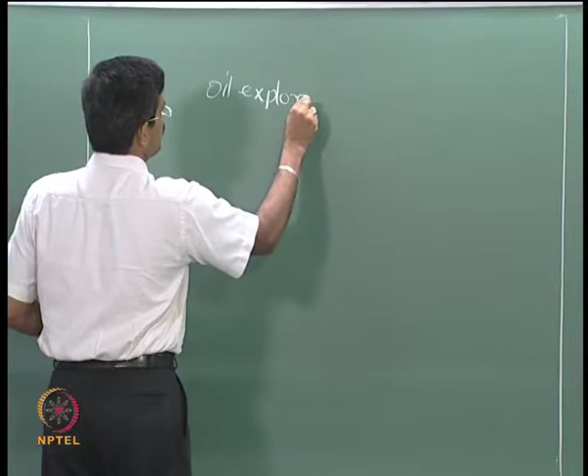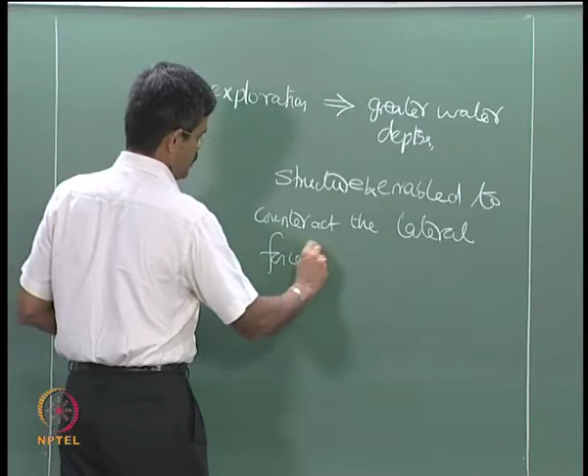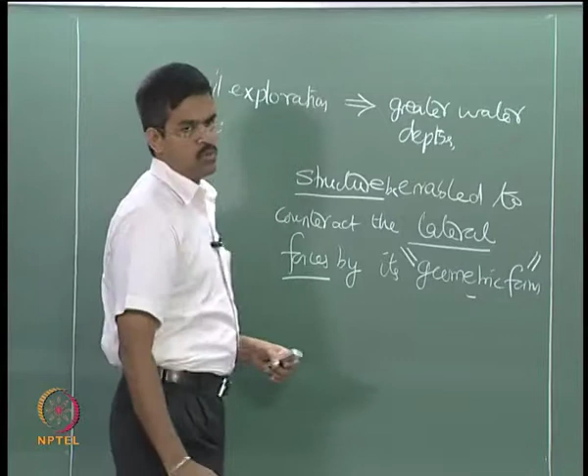As deep water oil exploration moves towards greater water depths, the structure should be enabled to counteract the lateral forces by its geometric form. A structure should be capable of alleviating the lateral loads by a new geometric form. Therefore, as you move towards greater water depths, you should have a structural form which adjusts itself for catering to the additional loads coming because of the greater water depths.

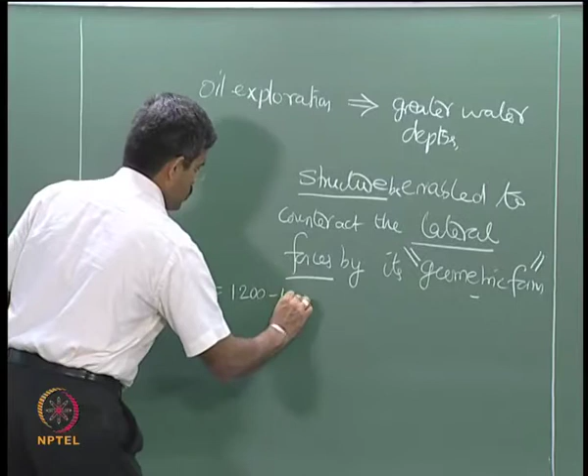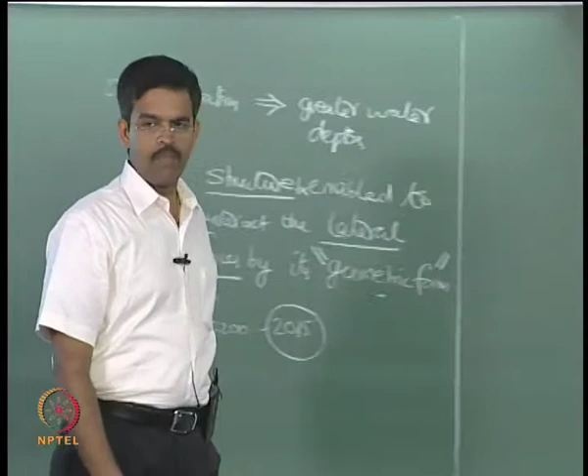We are now looking at exploration approximately in the present trend at water depths of 1200 to 1500. It is expected that we will go to exploration depths of even 1500 to 2200 by 2015, because hydrocarbon resources have started moving to deeper waters. Therefore, the conventional platforms, what we have in jackets structures, are totally obsolete now. They are of no use at all for any kind of new exploration.

So we are looking for new trends of offshore structures where most commonly people have started using FPSOs, and for exploratory drilling people start using drill ships, etc. But all these structures have their own limitations of positioning them for rough sea states. So we would like to go for a permanent installation, a structure or offshore system which can be installed permanently in a location for a period of 5 to 10 years, and which can also counteract the lateral loads in rough sea states at greater water depths.

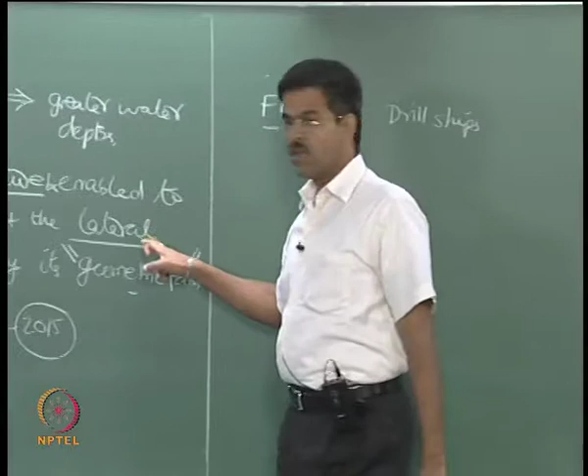So we are looking for new generation offshore structures which we will discuss in this lecture, where we will also touch upon the dynamic analysis. If you look at the new generation TLPs, even tensioned leg platforms have moved to deeper water depths. Two interesting forms have been arrived at: one is what we call Moses TLP, another is Sea Star TLP. Both of them are advancements in geometric design.

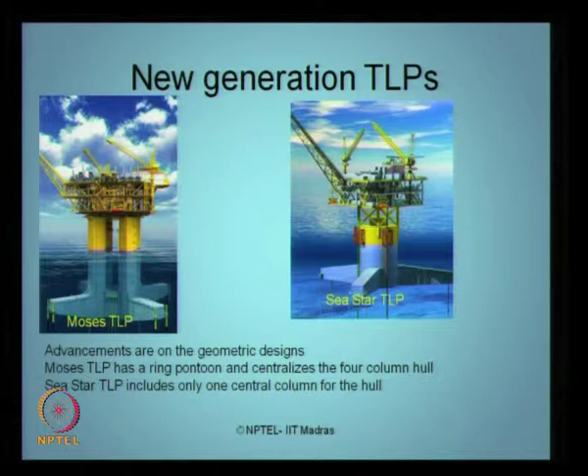In the first module of lectures we have given you detailed statistics of different kinds of TLPs constructed all over the world till the year 2012. Interestingly, people have moved further forward for greater waters, other than what TLP can cater to.

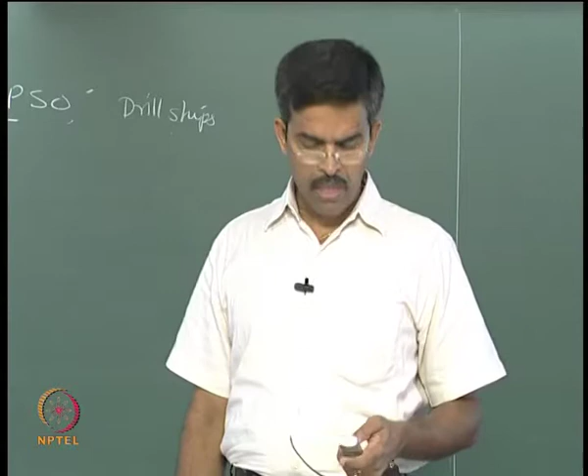So buoyant leg structures have become a very interesting and innovative application in offshore platforms. As the name suggests, each leg will float on its own self buoyancy, that is why they are called buoyant leg structures. Interestingly, only one platform has been constructed so far successfully, which is again on a trial basis, which I will show you now, based on which a new geometric form is attempted to be evaluated in the latest research. We will see what is happening here.

Before that, let us try to understand what BLS means. BLS are actually tethered spar. Buoyant leg structures are nothing but tethered spar with a single or group of cylindrical water piercing hulls. They are expected to be an alternate successful structural form to TLPs and spars, that is what literature projects. They are essentially positive buoyant structures. Positive buoyancy means the buoyancy will exceed the mass, as we understand in case of TLPs also. Therefore, they have got to be held down to the foundation of the seabed using some external restraining arrangement, usually it is tethers.

The positive metacentric height of this kind of structure is essentially maintained in the design. You can always maintain the metacentric height to be positive or negative with respect to the center of mass, depending upon your mass distribution on the superstructure and the hull. So you always maintain a positive metacentric height to ensure desired stability even after the removal of tethers.

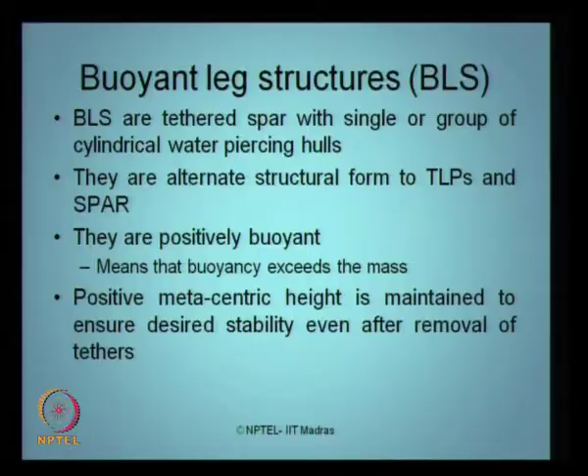That is a very important aspect, because in recent literature there are many cases of tether pull-out happening, especially in TLPs and guyed towers. The tethers get pulled out or cut because of marine trafficking or impact of vessels or barges on the platforms. So whenever a tether gets pulled out or disconnected, a positive buoyant structure will always tend to lose its stability.

So one important aspect in present research focus is, in case the removal of tethers happens, will the structure sustain its stability as a positive buoyant system. This is where we deviate completely from conventional platforms like jacket structures to fully floating structures, since they are not ships or FPSOs moved using a dynamic positioning system at a temporary location.

Of course, operational sea states for FPSOs and drill ships are entirely different from what we look for in a permanent system like this. In case any critical sea state is expected, FPSOs or drill ships are made non-functional. They will sail, but they will not be involved in production.

Whereas in these kinds of platforms there is nothing like a dynamic positioning system; it is a permanent, or more or less semi-permanent, installation which has to cater to rough sea states even when fixed, and we are talking about systems working at greater water depths.

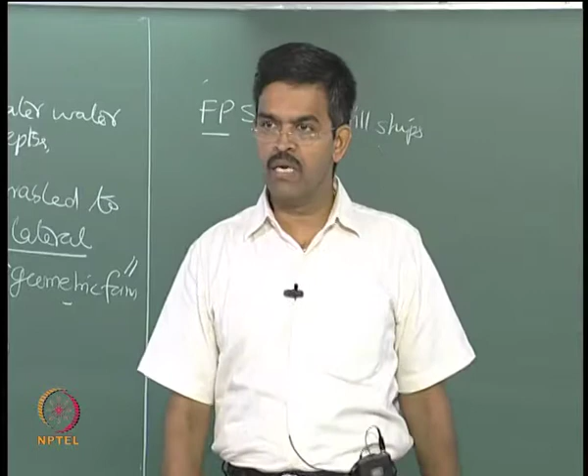So one important focus of this kind of research, as indicated in the literature, is that even though you get a tether pull-out in these systems, will the system remain self-stable and floating, or will it lose stability. Therefore, in most of these innovative forms, analytical, numerical and experimental work should focus on what we call free flotation analysis.

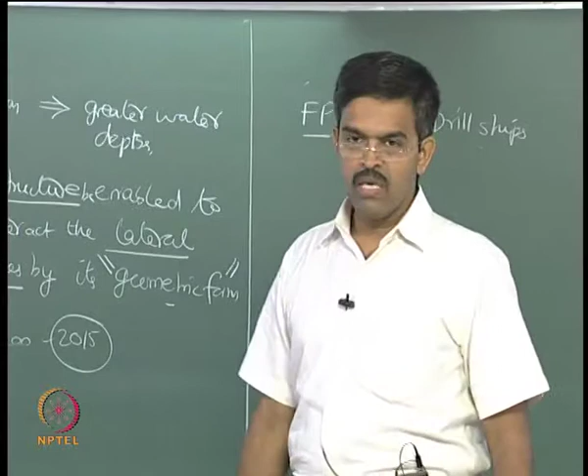This has become an important focus now in dynamic analysis of deep water or ultra deep water offshore systems, which was not a focus maybe 15 years earlier. We look for free oscillation studies, whether experimental, numerical or analytical, depending on the model being generated, because the focus is to check whether the system remains stable and position-restrained, or at least stays in position, even when the tethers are completely plugged off.

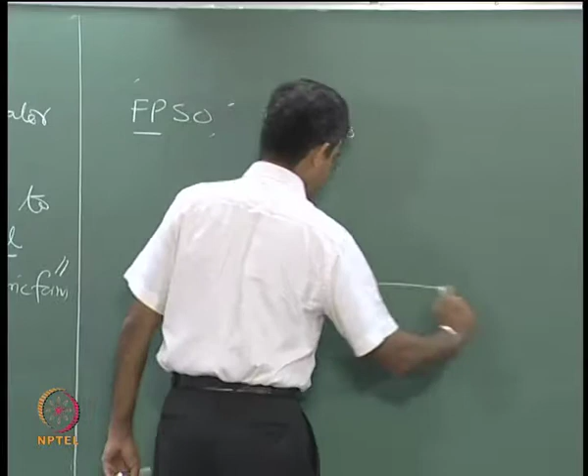So there is one more derived advantage from this kind of stability analysis. If I have a system—let's say this is the sea, this is the seabed, this is my system, maybe a black box—which is self-sustainable even when there are no tethers plugged into the restraining system...

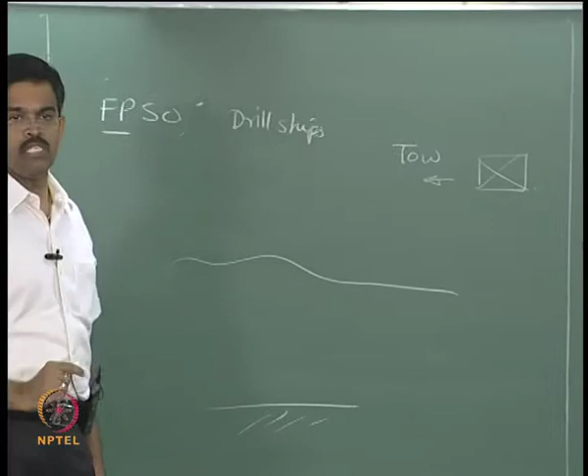One derived advantage of this kind of system is that I can easily tow it using a barge, so the installation becomes very easy in this case. Such systems, remaining self-stable without tethers in position, can be easily towed.

So the installation becomes easy, as well as decommissioning becomes simple. So there are two derived advantages gained by making the system self-stable even when the tethers are plugged off.

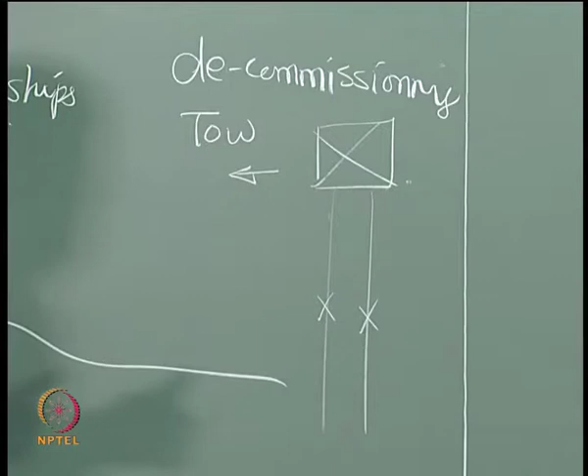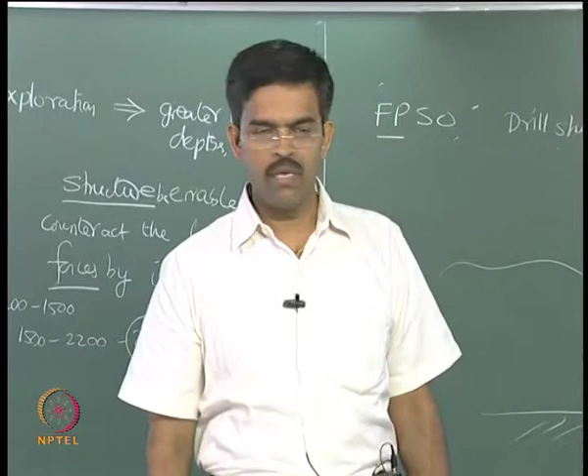Also, since the structure has positive buoyancy, to make it achieve a specific design draft you should be very careful in imposing tension T to the cables, so that the weight and T are adjusted to achieve the design draft for a specific sea state position. To hold it permanently in position, I need the draft, and the draft will be achieved only by imposing T naught—remember, because it is a positive buoyant system; otherwise it is free floating.

So towing, installation, commissioning and decommissioning become very easy compared to old generation platforms, which have been a Herculean task, especially jacket structures and gravity-based systems that have been very difficult. Now this system has become more comfortable. Therefore, our dynamic analysis should also focus on these kinds of studies if we really want to promote new generation platforms for deep waters.

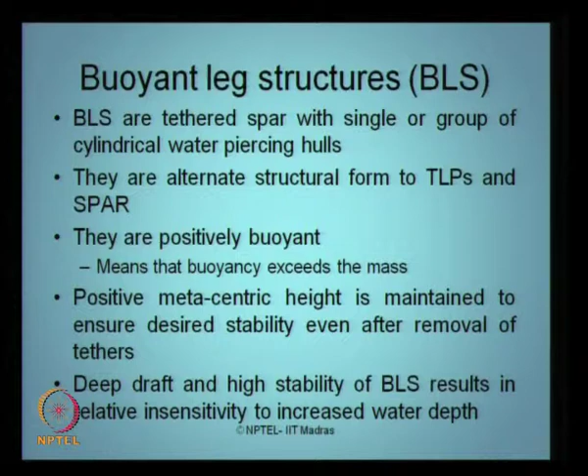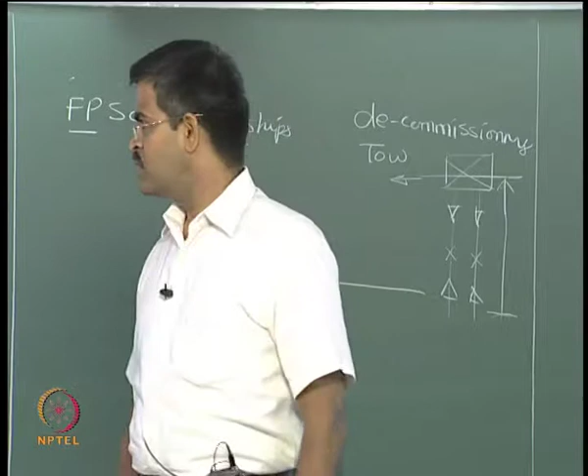Deep draft and high stability of BLS, as indicated in the literature, results in a relative insensitivity of these kinds of structures for ultra deep waters. That is one of the important reasons why buoyant leg structures are carried forward for new generation platforms, because the deep draft and high stability of these units make them water depth insensitive. You can carry them to any water depth you want. So one main focus for new generation structures is making the system self-stable, positive buoyant, deep draft and highly stable, and BLS is one such example.

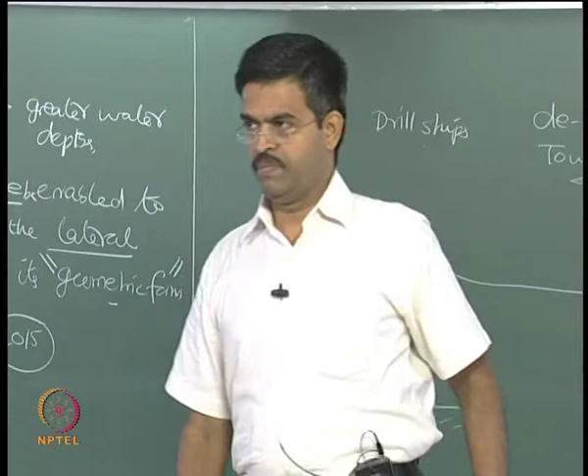Of course, the innovation does not stop here, it has started in recent times. The papers we show you now are only about 1 to 1.5 years old, just published in the literature, so people are now looking at this kind of platform. The concept of using BLS for production and drilling started only in 2005. The first paper was presented by an author at an ISOPE conference in Japan. So it started only about 6 to 7 years ago as a concept, but verification of this concept on a geometric form, experimentally, analytically and numerically analyzing it dynamically to see whether it is stable, is only about 1 year old. So it is a new generation platform relative to any other established platforms, and obviously asking whether such platforms have been installed has no meaning, because it is still under trial.

BLS, being a deep draft structure, reduces the exposed structural part near the free surface, which is a great advantage of deep draft structures. Therefore, this reduces the lateral forces on the structure compared to a TLP.

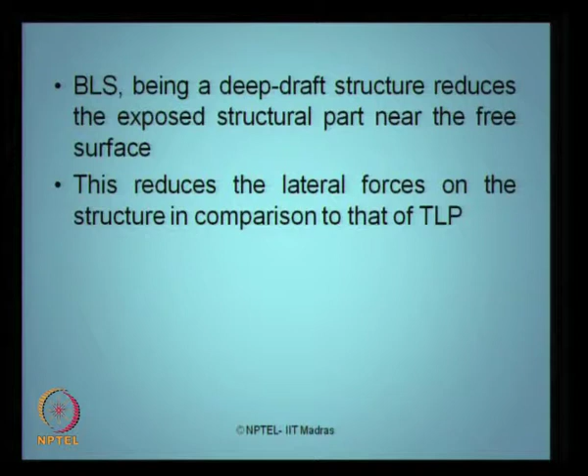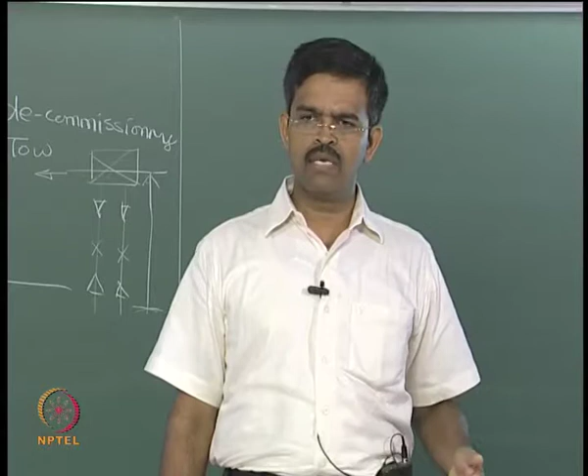Another advantage of BLS is that I can have a moon pool through which I put my risers, so the risers are also protected against lateral forces near the free surface, because the free surface is where wave forces are maximum. Therefore risers can be protected near the free surface elevation of the sea and will attract less forces. Of course, these advantages were also present in earlier conventional platforms. So the geometric form invention started by getting the merits of the previous platforms and overcoming the demerits of the older platforms.

Looking into the concept of integrating tension leg platforms into buoyant leg structures, a new structure was proposed which people have addressed as tension buoyant towers. They were designed and tested, essentially an amalgamation of BLS onto a TLP. This is the tension buoyant tower you see here, developed and designed by Horton Wilson Deepwater Systems Incorporation, US.

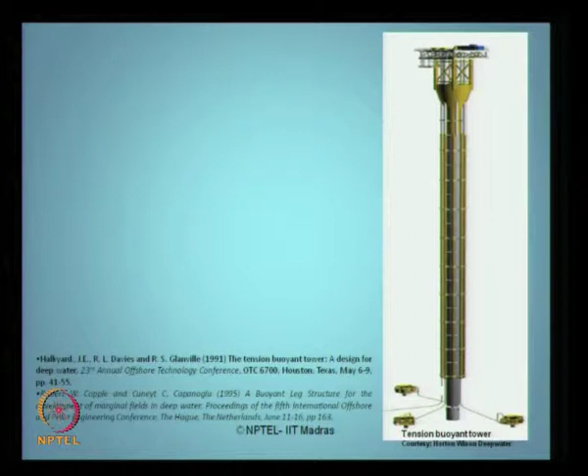Halkyard et al. first gave the design of this in 1991, published at an OTC conference in Houston, Texas. In 1995, Copple and Capanoglu gave a concept of BLS extended for deepwater offshore structures for production facilities. This is a classical tension buoyant system, numerically analyzed by Halkyard, not constructed. BLS had the advantage of a spar because of its shape, which resembles a classical spar with a deep draft feature. It also resembles the behavior of a TLP because it has a tether restoring system, with satellite subsea wells supporting it.

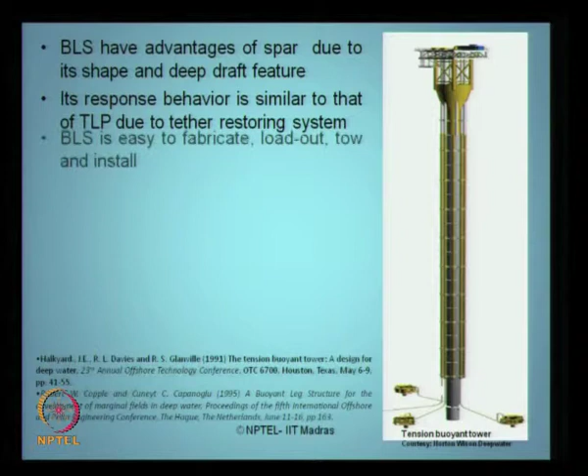The only demerit of this kind of platform, as proposed by the inventor, is that it is suitable only for leftover and marginal fields, since it cannot support larger fields because it does not have storage capacity. But the advantages are very significant for tension buoyant towers: it is a new generation deepwater structure, easily relocatable, simple to install and decommission, and very easy to fabricate and install. These are the two major advantages.

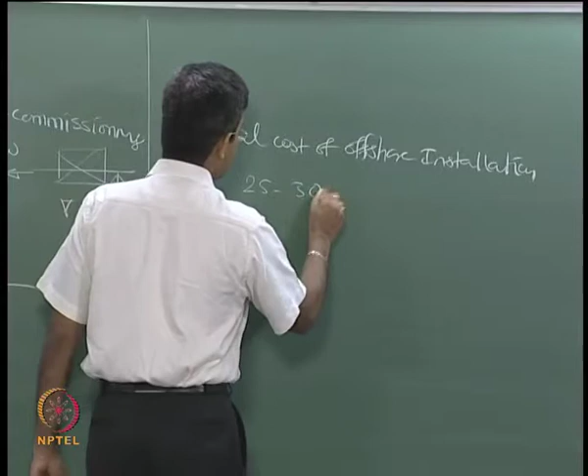For your understanding of why we are concerned about fabrication, installation and decommissioning, consider that in a total cost of offshore installation, which runs to about 10 to the power 5 billion US dollars, about 25 to 30% of this cost goes on installation.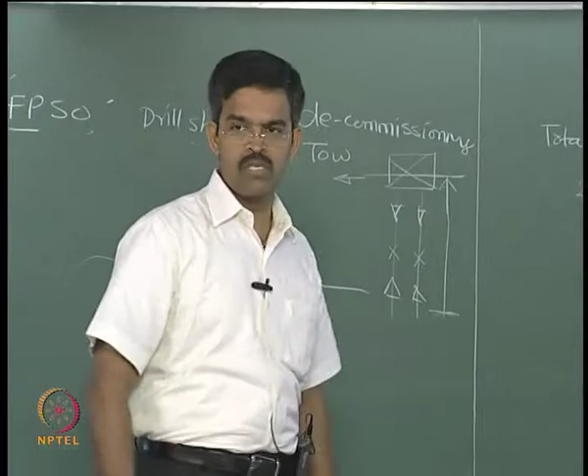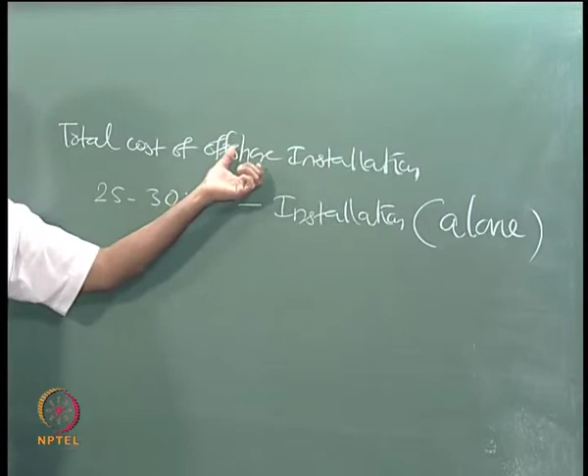Installation alone is a very amazing figure. You have only a countable number of contractors who can execute installation of deep water structures in Gulf of Mexico, very few. So they have a monopoly. It is not a disadvantage, it is an advantage, because the technical know-how of installing a system in deep water is a patented right of these contractors. So they charge approximately 25 to 30% of the capital cost, the capex, of this installation only for installation.

So if you really want to reduce this cost for deep water systems, I must think about a system which can be easily towed and installed. That is why the primary issue is focused on new generation platforms, on how they can be simply towed and commissioned.

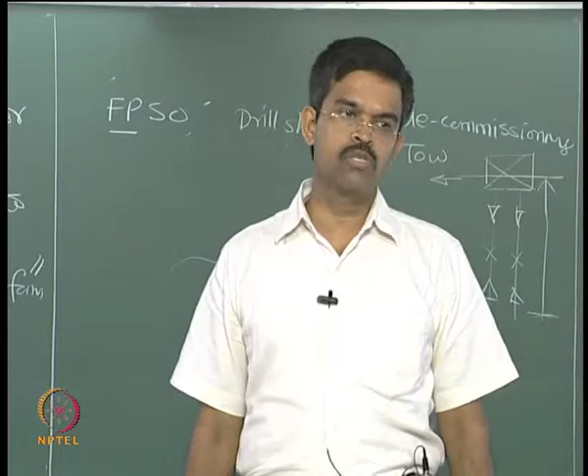So TBT came into play, and tension buoyant towers showed these advantages. Of course, no papers and no literature will give you a cost comparison of the installation platforms in the world commercially, only from an engineering perspective. But it is very clear from some financial aspects that about 25 to 30%, one third, of the capex cost of the platform goes purely into installation and commissioning. It is not that simple a figure.

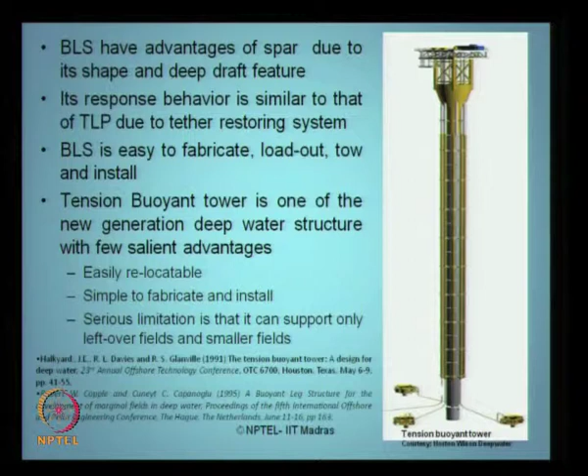This was proposed about 15 years back as a concept, a numerical model that was not constructed. Subsequently, a platform was attempted as a tension buoyant platform. The first buoyant tower, CX-15, was loaded out in Peru's Corvina offshore field, which has now become a promising figure, going to produce oil by end of 2013. It is a new platform, recently constructed and now commissioned.

There are other innovative offshore generation structures now available in the literature. Their innovative geometric form is understood to have improved motion characteristics suited for deep and ultra-deep waters. Some classical examples people have attempted in the literature: one is what we call non-ship shaped FPSOs. One may wonder why a ship shaped FPSO may not be a successful model.

FPSO stands for floating production storage and offloading facility. So it is a floating facility essentially, it has production facilities, it can do drilling, it can store, and it can offload. For example, you have a barge, and you keep transferring the extracted oil onto the barge and offloading it to shore. So it has all these facilities involved.

Essentially, people thought that unused barges and ships could be converted to FPSOs, because ships have very strong, favorable flotation characteristics for which they were designed. So people converted and remodified existing commercial ships, not passenger ships, and started using the hulls for FPSOs. But they found there are specific flotation characteristics associated with ships related to head sea conditions, which affect production in rough sea states.

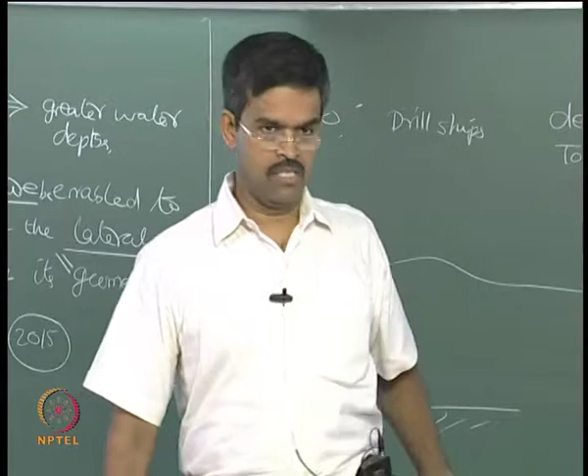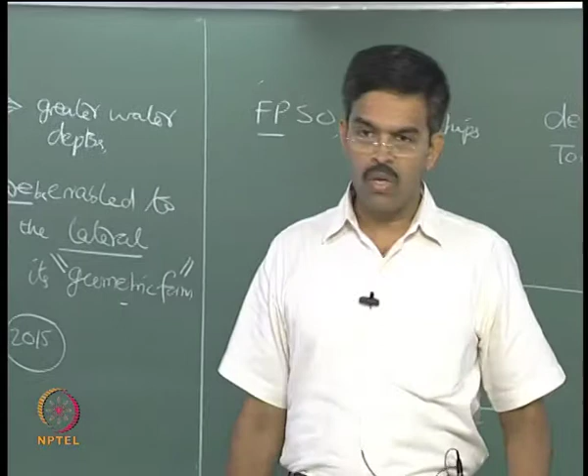So people thought, why do I have to have a longitudinal hull or a lateral reduction hull? Why can't I have a circular hull which can approximately represent common dynamic analysis characteristics for all approach angles of waves? So people said, I will go for non-ship shaped, not necessarily circular, hulls for FPSOs. That is one of the recent generation platforms people have attempted.

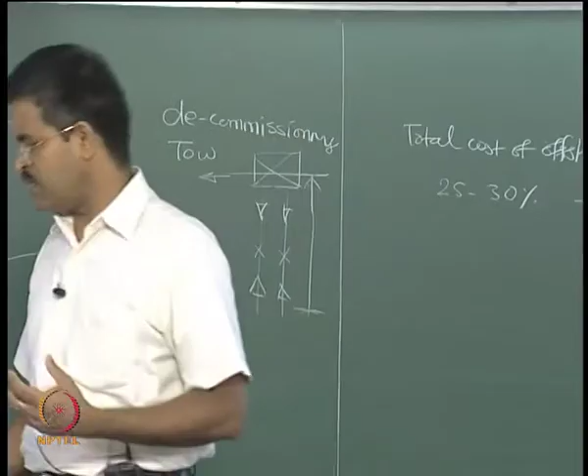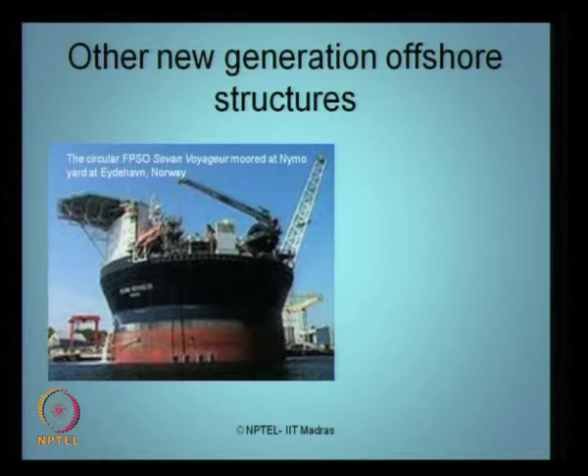I think you will appreciate that Norway is coming out with alternative renewable energy sources, and they want to make the country completely reliant on renewable energy by the year 2020. So it is a new kind of platform coming up, not for oil exploration but for shale gas, etc.

The other one is again a non-ship shaped, circular hull structure called Goliat. It is the first oil field developed in the Norwegian sector, a cylindrical FPSO. Production is due by end of 2013.

It is again a ship shaped FPSO, non-ship shaped FPSO. The third structure is what we have originated in our studies here, which is again a concept from Triceratops.

The Triceratops concept was first floated by White et al. in 2005, who said this platform can be used comfortably for deep water oil exploration because of some structural advantages it has. Let us go through these advantages quickly in this presentation.

It essentially consists of a deck which has the same topside detail as that of a conventional platform, and of course the tension buoyant leg structures.

The buoyant leg structures are what you see at the bottom, which are groups of BLS anchored to the seabed using tethers, therefore these are called tension buoyant leg structures.

Of course the BLS and the deck are connected interestingly by a ball joint here. So the ball joint connects the deck and the BLS.

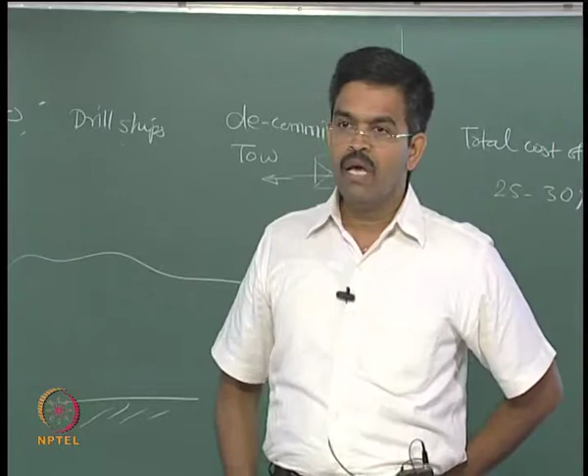The greatest advantage of this form, derived from an articulated tower, is that in case of any lateral load coming onto the BLS because of wave or current action, the BLS are not interconnected to each other. So each one of them has freedom to move independently.

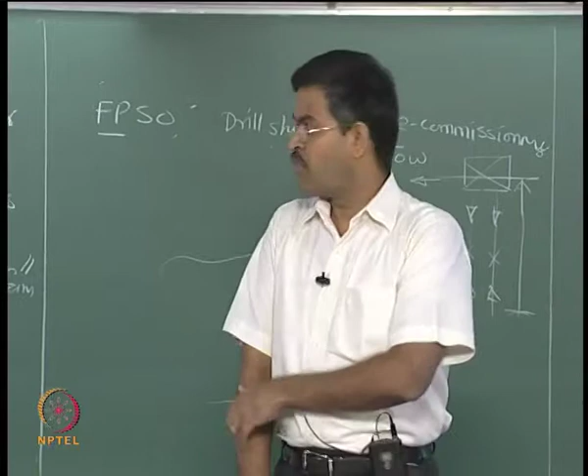This independent motion, essentially in terms of rotation, will not be transferred to the hull because of the ball joint. The ball joint absorbs the rotation from the substructure to the superstructure in case of rotational degrees of freedom. Similarly, when the hull starts rotating because of aerodynamic forces like wind action, that is not transferred to the BLS.

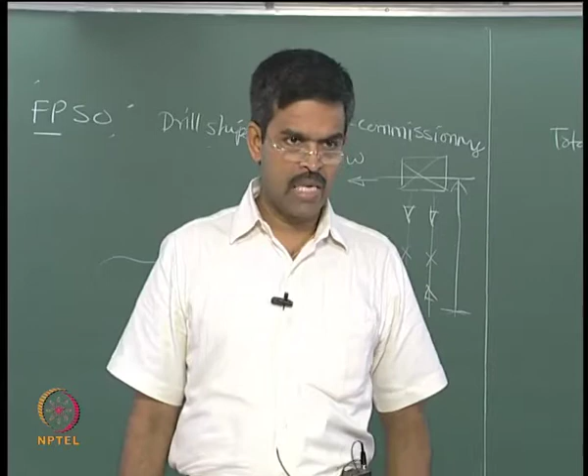It means certain categories of forces and displacements in terms of rotation are isolated from the dynamic characteristics by introducing a disconnectivity between the BLS and the deck, only in rotational degrees of freedom, whereas in displacement degrees of freedom like surge, heave and sway, this holds as a rigid body.

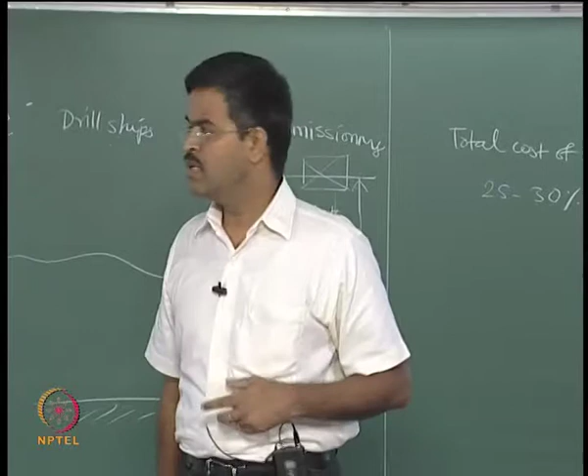So the advantage is, as we already see, there are distinct categories of frequencies as far as TLP is concerned. Similarly here, the response characteristics are isolated, so the rotations are not transferred, but the displacements are transferred 100%. So it becomes a rigid body motion.

Now, what is the great advantage we achieve by introducing this kind of disconnectivity in the rotational degree of freedom? The most uncomfortable region of working for a deck or for people on board is that rotational motion.

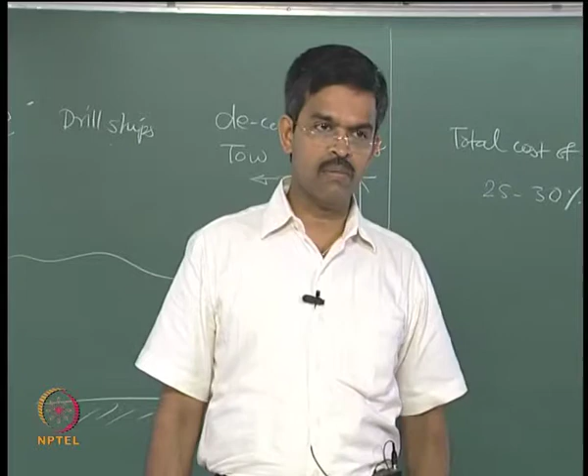In case of heave, the heave displacement, being a tether restrained system, is relatively very low, but the differential movement because of wave action with respect to any rotation, maybe pitch or roll, is phenomenally high because surge is very high.

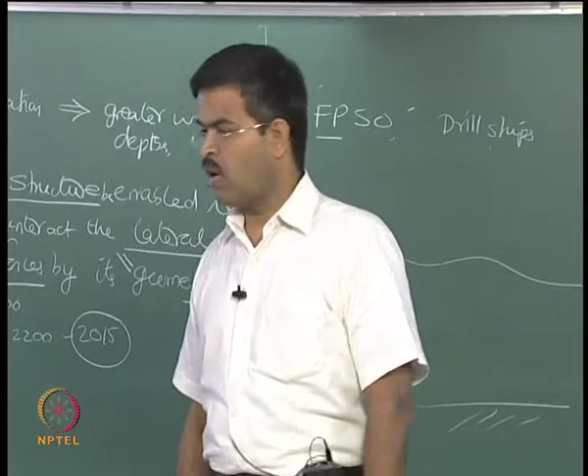So this rotation will always cause discomfort to people working on board, as well as it can cause a lot of risk to the riser systems connecting the subsea to the superstructure or the deck. So to avoid this kind of rotary motion on the deck, it has been isolated from the substructure or from the BLS to the deck using a ball joint.

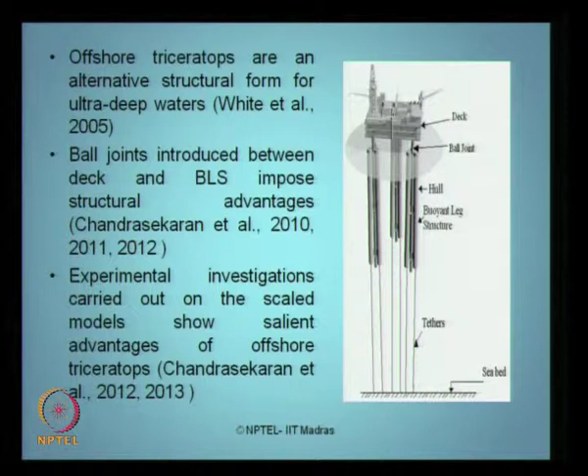So the ball joints introduced between the deck impose structural advantages, which can be seen from different papers here. Some experimental investigations have been carried out on scaled models to show some salient advantages of this with respect to other conventional offshore structures, which we will see. There are some distinct advantages derived from the experimental and analytical studies done.

They have got better motion characteristics, so they are suitable for deep waters. It has improved dynamics in comparison to TLP, as we will see. The wells are within a protected environment, laterally supported. It is a simple structure, requiring simple station keeping, and is easy to install.

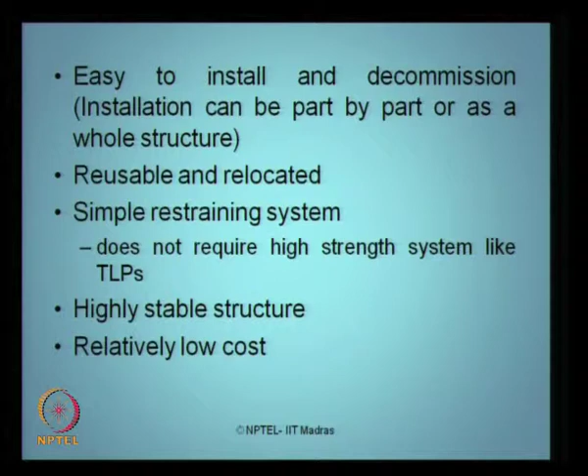The whole structure can be reused and relocated, which is very important. It has a very simple restraining system compared to that of a TLP. It is a highly stable structure, because I will show you how free flotation helps ensure high stability even when the tethers are pulled off. It is relatively low cost, as I'll talk about savings in installation.

So, essentially to impart or to understand the free flotation characteristics, free oscillation studies have been conducted on this particular platform in a scaled model to understand the installation complexities of this new geometry. A scaled model was investigated.

This was the model considered with a triangular deck on top with 3 legs, that is why it is called triceratops, and you have got the BLS on top, and then the hull or the deck is connecting the BLS by a ball joint, and the BLS are anchored to the seabed using tethered or cable systems.

So, these two figures will show you the ballasted BLS, because I want to have the installation of the BLS proper in case of flotation. So, I am ballasting the BLS at the bottom here, you can see these are the ballasted BLS, these are the ballast being used. This draft level is supposed to be, and these are my ball joints which are elaborated or highlighted here.

So, this is my ball joint, you can see here the outer cover is made out of HDPE and this is threaded, this threading is connected to the deck, and this ball joint is isolated in terms of rotation with respect to the substructure of the BLS.

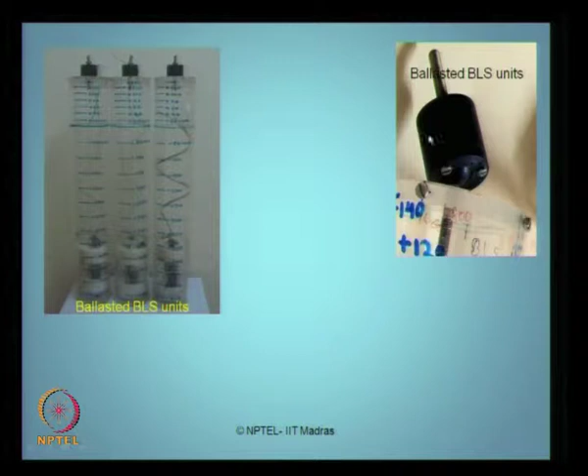Interestingly, if you look at the natural periods of this platform when they are not tethered off, the heave has got about 20 seconds and the roll and pitch also has about 20 seconds, whereas in conventional TLP you see the heave periods are varying from 2 to 5 seconds.

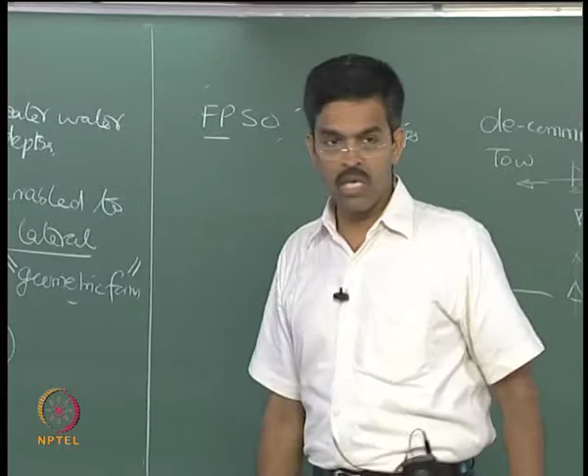It means this structure is considered to be relatively flexible compared to a TLP in a stiff degree of freedom, because these are all stiff degrees of freedom: heave, pitch and roll. I am not talking about surge, sway and yaw which are otherwise flexible degrees of freedom. We are talking about heave, pitch and roll, which are considered to be stiff degrees.

The stiffness in these degrees of freedom are relaxed by introducing a ball joint. Even when you pull off the tethers in flotation, this gives me a period of about 20 seconds.

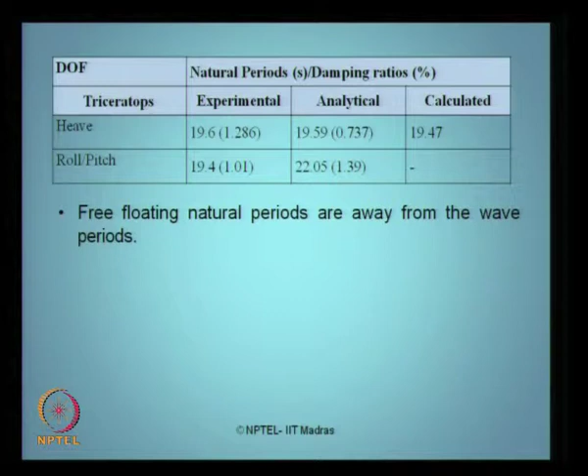Now, you may wonder what is the beauty about this in terms of installation. The free floating periods are very well away from the wave periods. What does it mean is the wave will become insensitive, because wave periods generally vary from 6 seconds to 15 seconds, maximum is 15 seconds, but my period is around 20. So, the platform is expected to remain stable under free flotation conditions.

Free flotation means tethers are not connected to the seabed, they are freely floating, and remain stable. But of course, you have got to take care, because during commissioning you have to impose T0 on the tethers. So, its free flotation periods are very high, therefore you have got to take care while installing them in the sea state.

And also interestingly, if you look at the damping ratios, it is closely only about 1.3% to 1%. So, the damping is relatively low. What does it mean is instantaneous decay of response will not occur, which will also cause material degradation and material loss to the deck or to the BLS if the damping is very high. So, damping low means it will come to rest, but slowly.

And of course, the results have been compared analytically, experimentally and computationally, and you will see there is a close agreement, at least in the periods. In the case of damping ratios, the one you get experimentally includes hydrodynamic, aerodynamic and structural, all three, whereas analytical is a Rayleigh damping. There is no hydrodynamic characteristic into this, therefore there is a variation in the results.

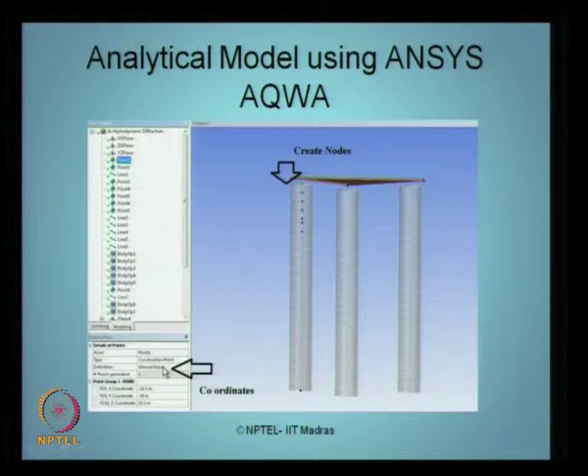You can see here these are the coordinates manually given as an input in ANSYS AQWA to create the nodes. Once the nodes are created, then you have to create the line elements from the nodes by joining them to create the members. Once the line elements are created, then you create the deck using a surface modeling as a deck meshing.

Once this is completed, now you have to separate each one of the BLS independently. See that there are 3 kinds of structures, rather there are 4: BLS1, BLS2, BLS3 and deck. So, there are 4 independent units.

So, one can easily measure and see the dynamic response behavior on any sea state condition for this platform independently on each of the legs, and see which leg will fail first, if at all it is failing. They are not connected at all, they are independent, and there is a reason why they are made independent: the BLS are made independent because there is no connectivity between them. The deck and the BLS are made independent because there is a ball joint in between them. So, the degrees of freedom for the BLS and the decks are different. So, the platform is analyzed using a 9 degrees of freedom model like this.

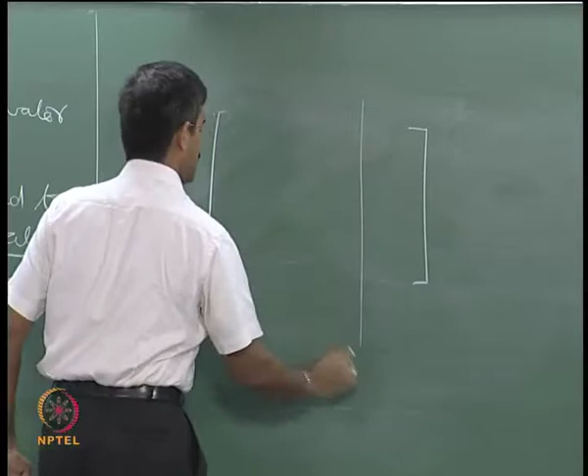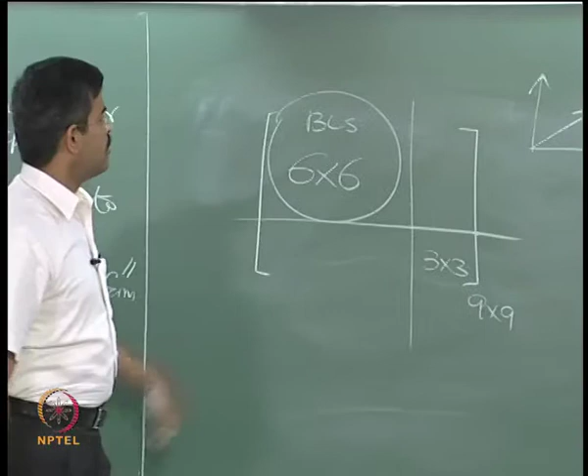My mass matrix, I am partitioning it. This is 6 by 6 and this is 3 by 3, so I have a mass matrix of 9 by 9. This corresponds to BLS, because in the CG of the BLS I have all the degrees present. Corresponding to the deck I have only 3 degrees present, which are only the rotations, because the rotations of the deck are independent of that of the BLS, whereas the displacement degrees are common in both cases because of rigid body motion. So easily I can find out the mass matrix of the substructure, that is the BLS, and the mass matrix of the superstructure, that is the deck, independently in these 9 degrees of freedom. That becomes a mass matrix.

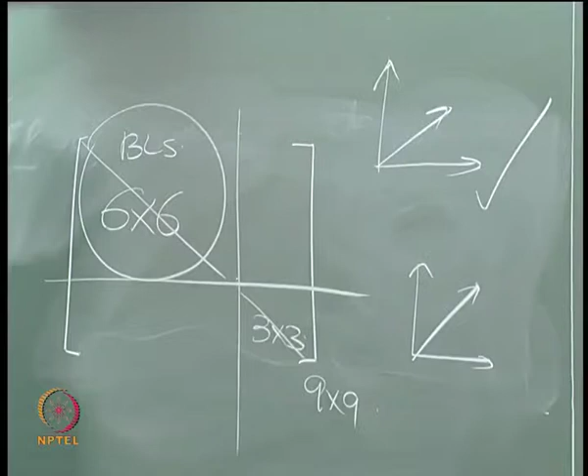Similarly, the K matrix will also have a similar concept. Again partition, this is 3 by 3 which is for the deck, and this is 6 by 6 which is for the BLS.

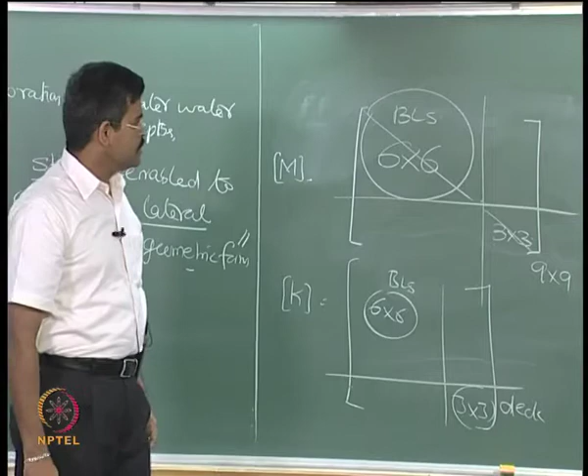Should you be interested, we can explain this derivation in detail in another lecture, but anyway I will give you a reference, you can read it from there, it's available online. The whole derivation of mass matrix, stiffness matrix and the Rayleigh damping matrix is available in the paper directly, you can see it from the paper directly.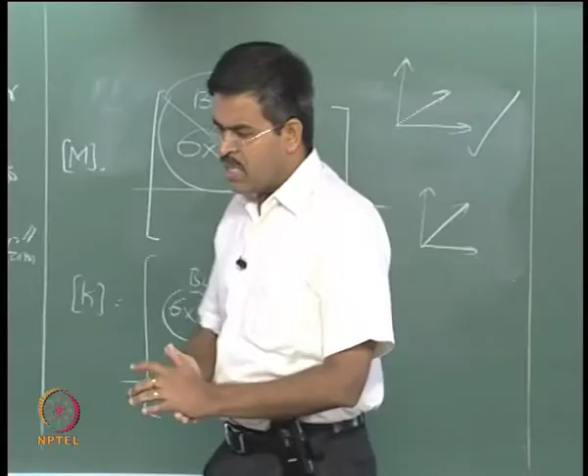So they are made independent. You can see here there are 4 system units: BLS1, BLS2, BLS3 and deck, and they are independent. After creating this...

Then the water depth details are given. This model has been analyzed to start with at a depth of 600 meters. Of course, this has been tested at a depth of about 1500 meters also, but the results we show here are only for 600 meters. So you have to manually enter this value for analysis.

Once this is done, you have got to specifically enter the values of center of gravity, mass of the structure, and radius of gyration, which you can calculate mathematically once you know the m, rx, ry and rz values for the given geometry. So this is what we have entered here.

So in the AQWA details of the point mass you have got to enter these values, and this is the point where the CG of the system will be entered for the BLS, and the CG of the system for the deck will be entered at the top separately. Then the mesh is being formed for the BLS as well as for the deck. This is how it looks like.

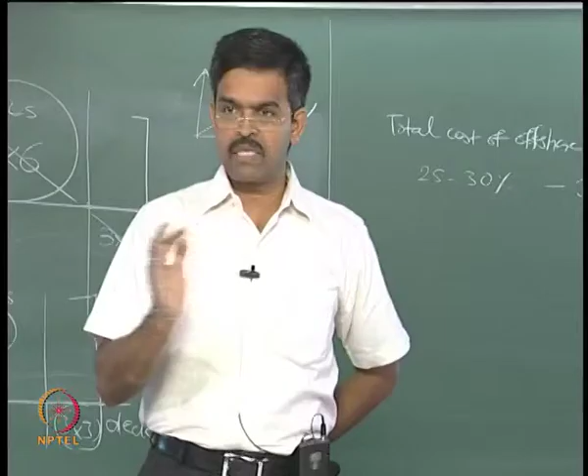This is what you see here is the CG of the superstructure, which is nothing but the center of rigidity of the lateral forces acting on the body also, because of the top side details. Top side details are not shown in this model here, but they have been made, and then you can introduce this center of rigidity, which is because of the lateral force acting on the top side details.

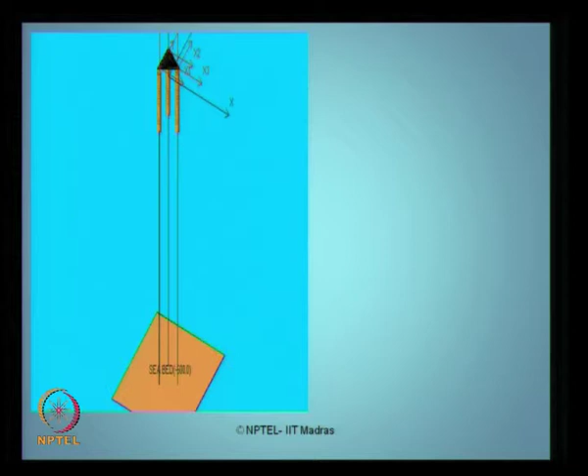Then these are the wave directions for which the model will be activated. Once this is done, this is how the developed model will be anchored to the seabed. These are my principal directions of x1, x2 and x3. This is my closed view of the model.

You can see here the ball joint being connected with that of the BLS and the deck here. So each one of them have independent coordinate systems x1, x2, x3 and so on. So they are independent, so one can measure them separately.

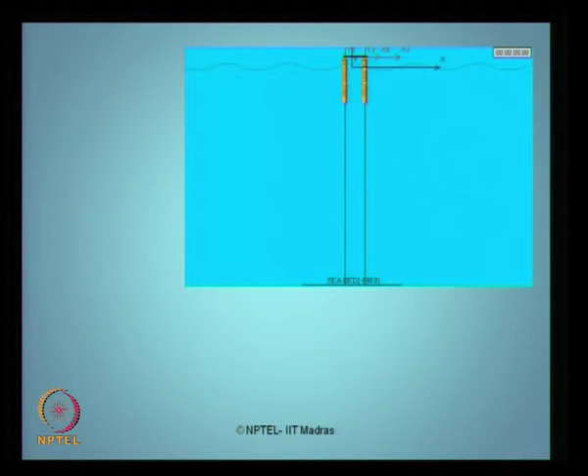After understanding this, how the model will be installed at a depth of minus 600 meters with 0 as MSL. This is a closer view of that. This is my wave direction.

So therefore you can see the instrumentation on the top for experimental analysis. Instrument accelerometers A1 etc. have been kept, one on the CG of the deck and one on the BLS, to compute the relative motion between the BLS and the deck independently. These are all triaxial accelerometers which can measure the surge and sway depending upon what you want, and the incremental will give me the differential rotation.

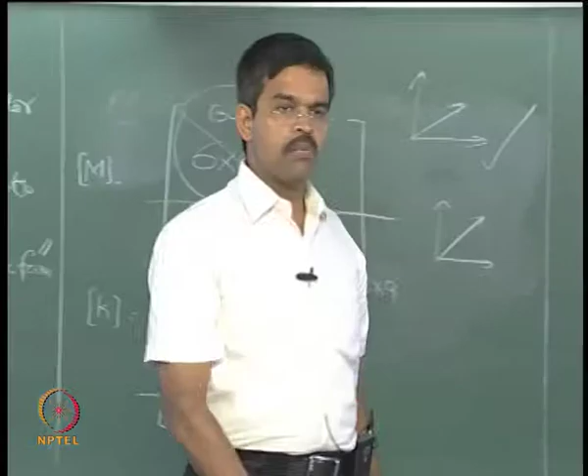So, some quick conclusions from what we have shown you are: due to the presence of the ball joint, the rotational response of the deck is far lesser than that of the BLS. There is some influence on the deck having heave response at 90 degrees, which can be due to the differential phase lag of different BLS, because they are independent of each other. The experimental, analytical and computed periods closely agree.

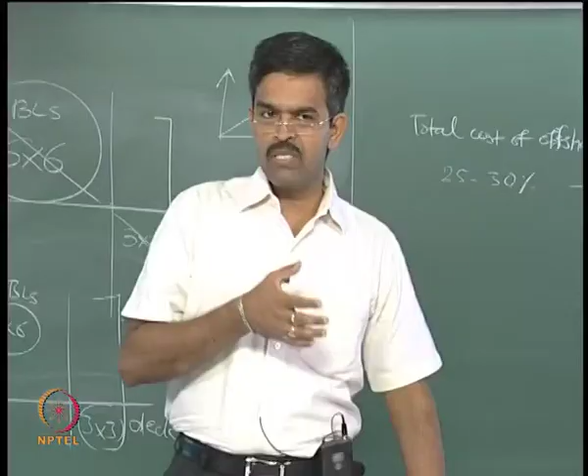That is one of the important advantages which will avoid pull out of tethers under severe lateral loads. Therefore, this platform can be carried forward for ultra deep waters, that is the advantage.

And you can also see here, because of the heave restraint system, the platform is generally not influenced by wave directionality, as we see most of the results are almost marginally similar to each other.

The pitch response of the deck is much lower compared to the BLS, which tells me very clearly that there is no transformation of rotational responses from the BLS to the deck or vice versa.

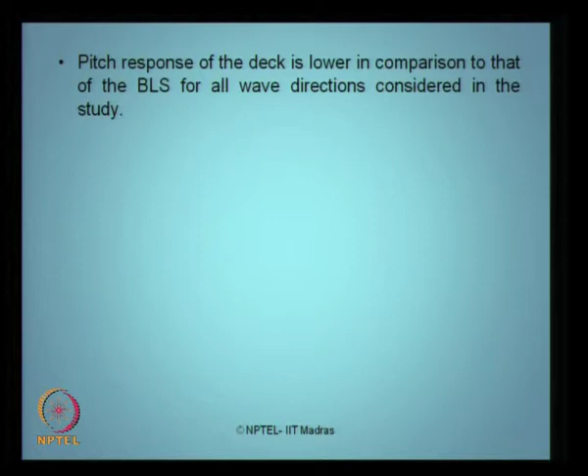The proposed platform shows more comfortable working. I will show you a very interesting video which will help you realize that the rotation of the BLS does not transfer to the deck at all. Physically you can see it in my video.

So, there is a good agreement of experimental results, which shows there is a possibility of modeling this with proper or appropriate values of damping on the hinge and the friction damping imposed by the ball joints, because there is a close agreement.

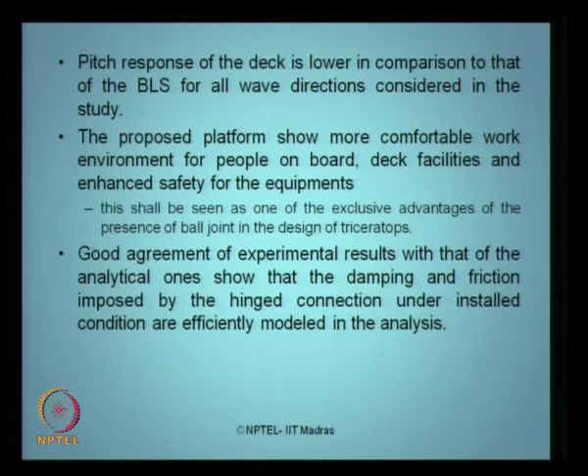Some interesting references which you can read: Minoo Patel on compliant offshore structures. It is very interesting that only we, at IIT Madras, made research on this. There is no other paper available on the net today on Triceratops, except one conceptual paper by Professor White presented in 2005 at one of the ISOPE conferences. That is only a concept. There are no references available for analytical, experimental, or numerical investigations done on this kind of new generation platform for ultra deep waters.

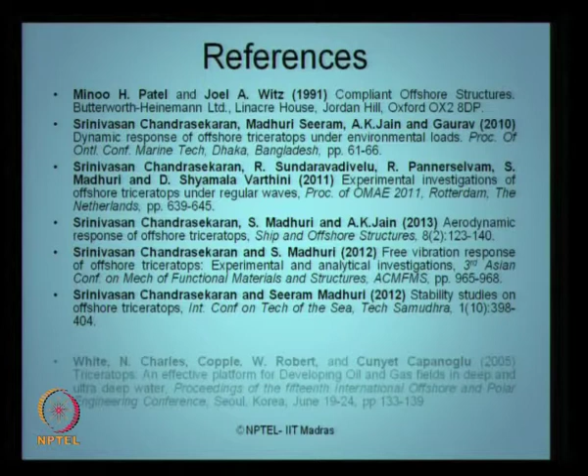This is the paper by Charles and Capanoglu in 2005, stating that a concept of Triceratops can be attempted for ultra deep waters; it is only a concept introduced. This was patented, technology transfer has now been done, and we are trying to push this forward to places where ultra deep exploration happens in the world. Of course, it cannot be done in India because we do not have oil exploration happening beyond a certain depth here. So we are looking for a depth where the installation or exploration depth is approximately 1.5 kilometers.

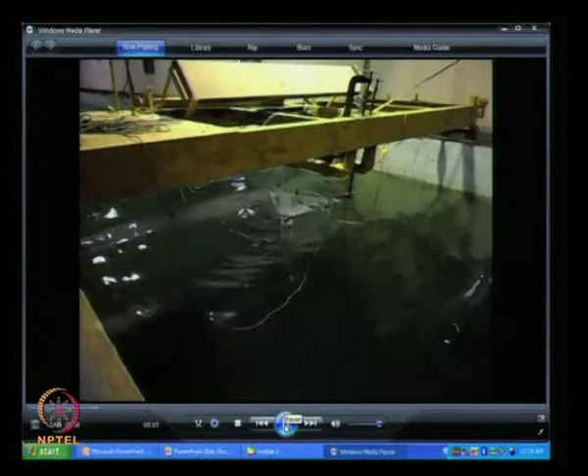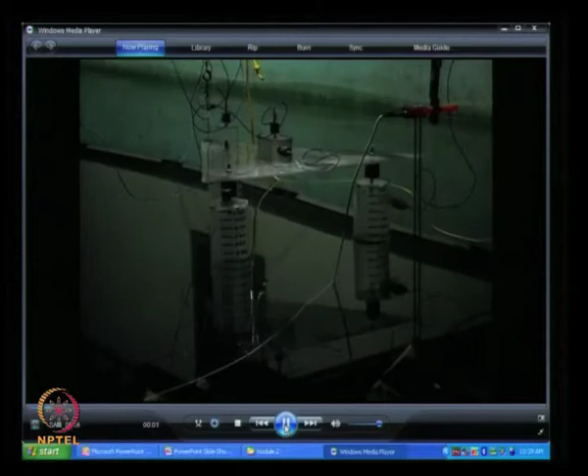So, let us look at the video. You can see here, for short period waves, the independent rotation of the BLS, whereas the deck almost remains horizontal. The deck has almost no yaw motion, no roll and no pitch motion. Of course there is no roll motion happening, possibly due to unidirectional waves, but there is no pitch motion happening, and this is true in the case of long period waves also.

This is a long period wave now, the other video is running. You can see here the relative motion in heave direction; the draft variation does not bother the deck at all. That is a very interesting understanding which has been verified experimentally, numerically and analytically for this kind of new generation platform.

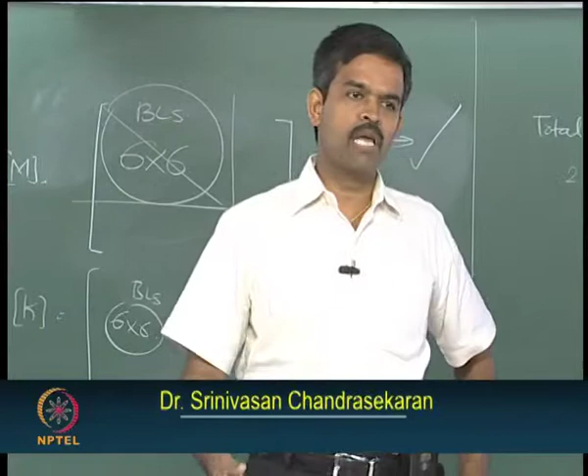This will be the last lecture as far as module 2 is concerned. We will talk about module 3 from the next class onwards, covering advanced applications of dynamics on offshore structures, including stochastic dynamics applications, and then response reduction using hydrodynamic response reduction via perforated cylinders, etc. That will be around 5 lectures maximum in module 3, addressing some advanced topics related to dynamics of ocean structures.

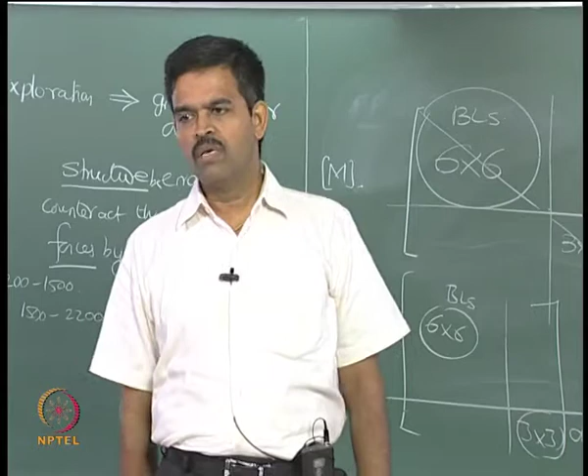So, new generation platforms are on the move. People are looking for geometric innovativeness, shape geometry innovativeness. Of course, people are also working on material innovation like light buoyancy materials, etc. That portion is not discussed within the scope of this lecture. People are also using different kinds of materials, but we are not looking at that here.